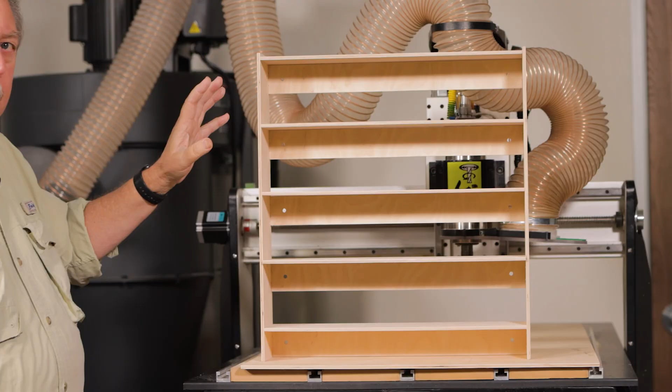Obviously, if we want to make it permanent, we would put some glue in these joints. But you can see how strong it is already just by making sure our joints are nice and tight. So what we'll do in the video today is go through the design software, Vectric VCarve Pro, show how we put the slots, how we decide where they go, and how we create the joinery necessary to cut this piece.

We'll be using Vectric VCarve Pro to do the design and walk through the design thoughts and concepts as we build a shelf similar to this one. It won't be this exact shelf. There's been some improvements put into the design, such as the support of these shelves. You'll notice this is sagging slightly. So we're going to take these backs that attach the shelves to the walls, and we're going to move them up adjacent to the shelves so they act as a support mechanism.

This is an example of a shelf we're going to build. As you can see, the support bracket, which attaches the shelves to the wall, also is directly underneath the shelf, helping to support and reduce sag when we're loading.

Each of these support brackets are going to be 2 inches by 18.5 inches long. Each shelf will be 18.5 inches long and 4.25 inches deep. The side structures will be 4.25 inches deep and 21 inches long. Those numbers will become important as we walk through the design of the shelf in the Vectric presentation.

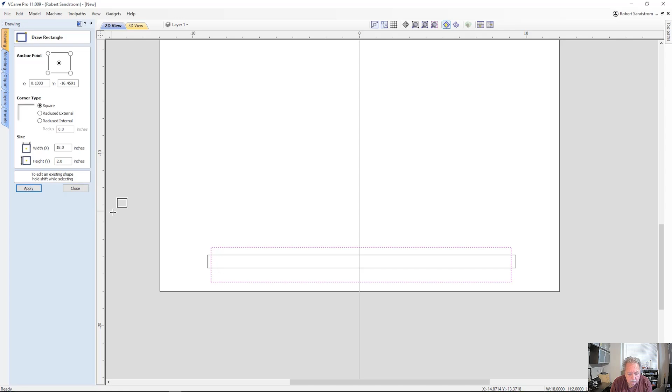Next rectangle for the piece we want 18 inches by 2 inches. Hit apply. Hit close. Take both of these and we'll center them in the material widthwise, so they should be centered within themselves. Close. Take this piece here, the tab, and put it right in the center.

So I select the inner vector first, then I select the outer vector, and instead of aligning to the material, I'm now going to align it to the vectors, and I want to align it in this direction. It should be already aligned here, but I'm going to make sure. All right, so close. So now we're at a point where I know, let me move this up a little bit.

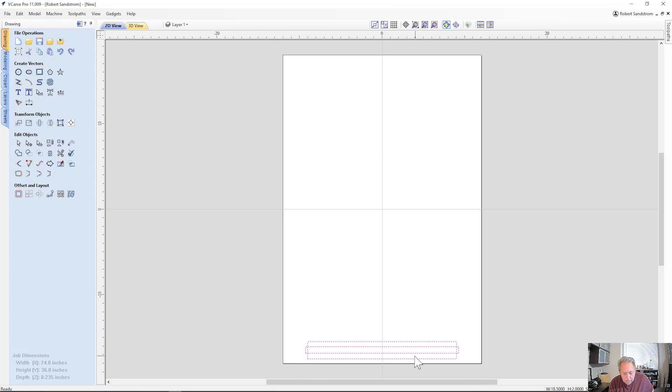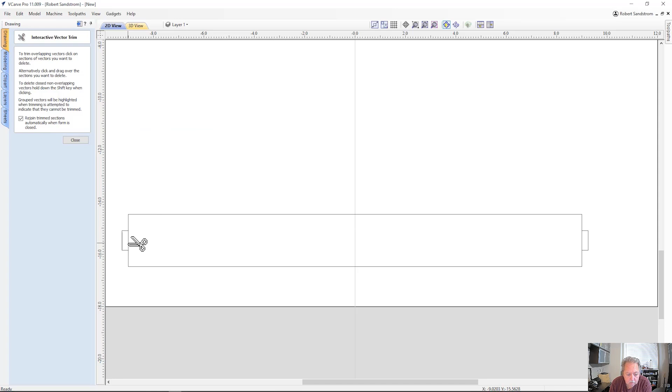All right, so now I know this is centered. I can make the component by taking out the parts of the vector that are no longer needed. So we'll use the interactive vector trim tool, make sure the rejoin trimmed sections is checked. Click here, here, here, and here. Close, and the result should be a closed vector. We'll validate,

close. Okay, the next thing I want to do is create holes to mount this bracket to the wall. I want to make them 16 inches apart, and the best way to do that is to first create one in the center and then mirror it. So now we're going to create a circle right there in the center. We're going to make that 9/32 equal. That's the size I want.

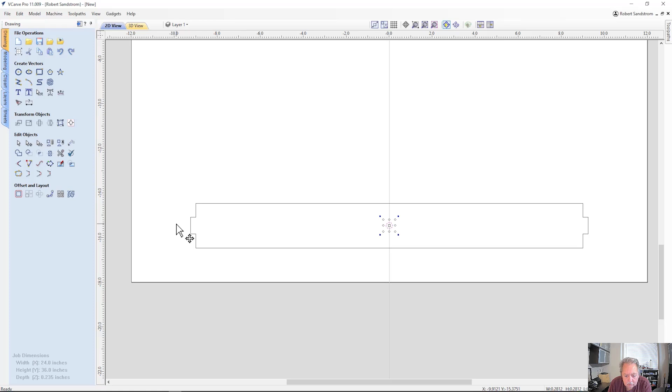Hit apply, hit close. So now we'll select the circle, and we're going to use the move tool. Using these tools keeps the accuracy. We're going to make it 16 inches total, so I wanted to make it minus 8 inches, 0.0 inches in the X direction. That puts it exactly centered 8 inches over.

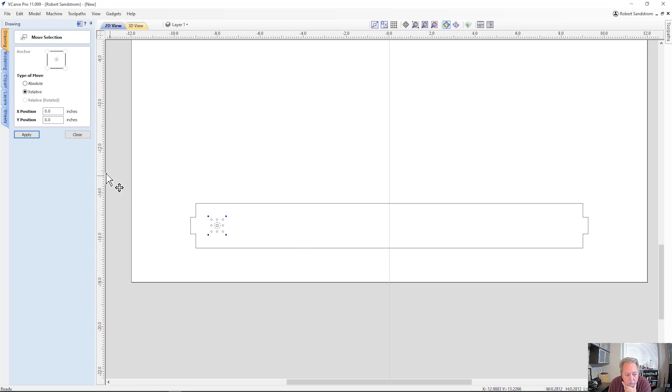Hit close. Then I use the flip tool, and since everything's centered, I can flip it horizontal and create a mirrored copy, and it should be exactly in the center. And we're set, and we've got our first component done, which is the bracket that goes across the back. It supports the shelves and allows it to attach to the wall.

We'll move on to the second component at this time, which are the shelves themselves. That component is 4.25 inches by 18.5 inches with 0.75 inch tabs. We'll start out once again by making the tabs. Use the rectangle tool, and we'll make it 0.75 by 18.5. So 18.5 inches wide, 0.75 inches tall. Hit apply, hit close,

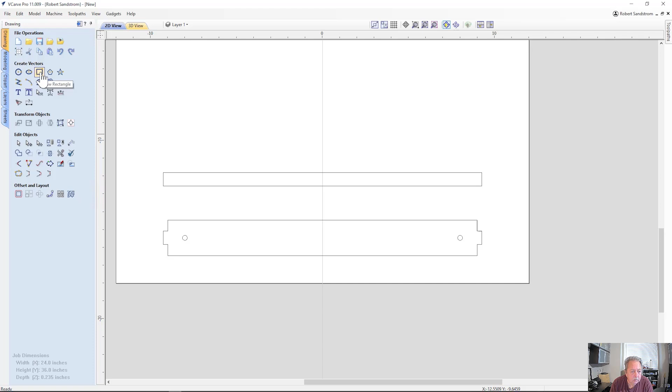hit a rectangle. We'll start in this corner, same corner, so we're aligned. And then I'm going to make this one 18 inches and 4.25 inches. We're doing that because this piece will be like this one with tabs. So hit close.

And the first thing I want to do is align these along the bottom. So this is the first vector. I'll click the second vector. We'll use the alignment tool again. See how I keep using this tool. We're going to go ahead and align. Oops, wrong direction. We're going to align in this direction so it's aligned along the bottom. Then we're going to align so that they're centered, by selecting this one first and this vector second. All right, so now we're centered.

Next step is to put these in the right area. So the front of the shelf, I want to make 0.5 inches away from the bottom. So I'm going to select this vector. I want the tab 0.5 inches in, and I'm going to move that tab in the Y direction 0.5 inches. Apply. Close.

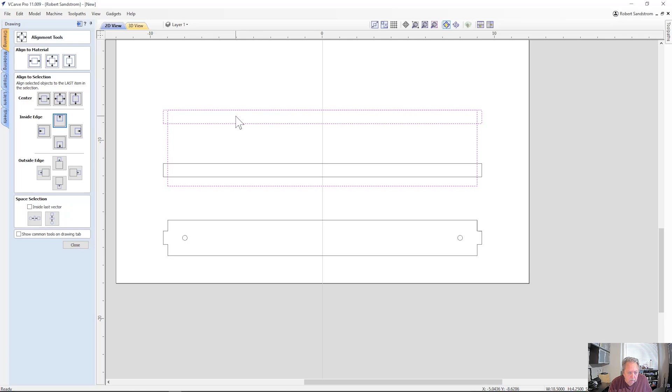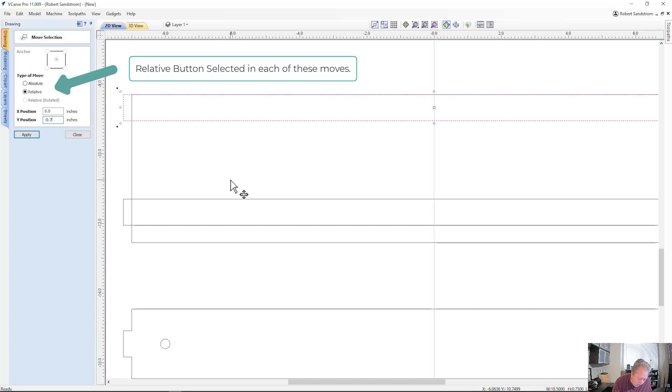So I want to move this vector now. Close. I want to move it using the move tool, negative 0.75 inches in. Close. And the reason I wanted to do that is the shelf is actually, I'm using nominal values, about 0.25 inches thick. It's really probably 0.23 or so.

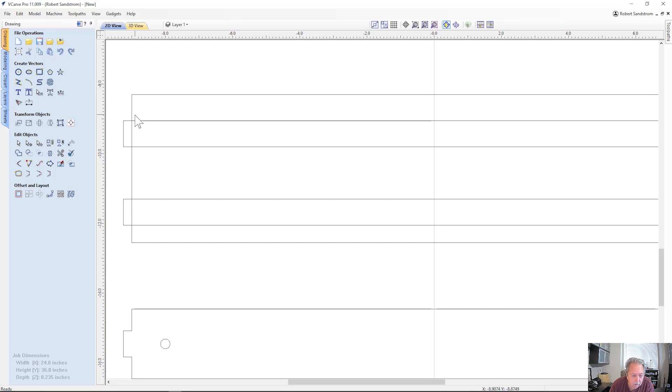And I'm going to put the slots for the shelf supports, these ones right here, starting about a 1/4 inch in, allow a 1/4 inch this way, and so the tabs I want to be far enough in where they're not blocking us putting in these supports. Now I will turn it into a component by using the scissor or interactive vector trim tool. Remember, this has to be checked.

And now we have our second component built, which is the shelf. The next component we're going to build are the side pieces, which actually hold all the shelves and the support brackets, and it admittedly is a more complicated piece. But taking one step at a time, it's not all that bad. It's just that we've got to make sure everything is done right for everything to align.

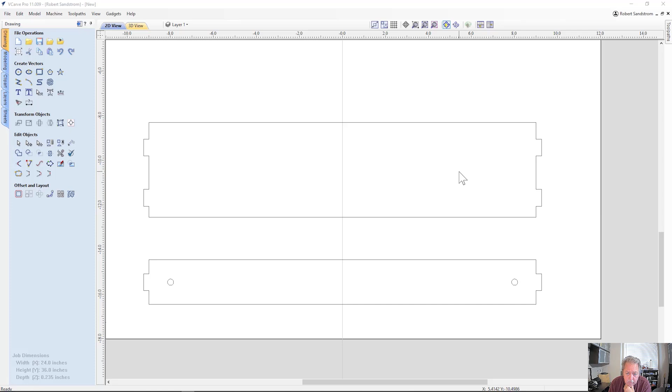Well, actually the sides are 20.5 inches by 4.25 inches. Use the rectangle tool. So we're going to take it 20.5 inches by 4.25 inches wide, hit apply, hit close.

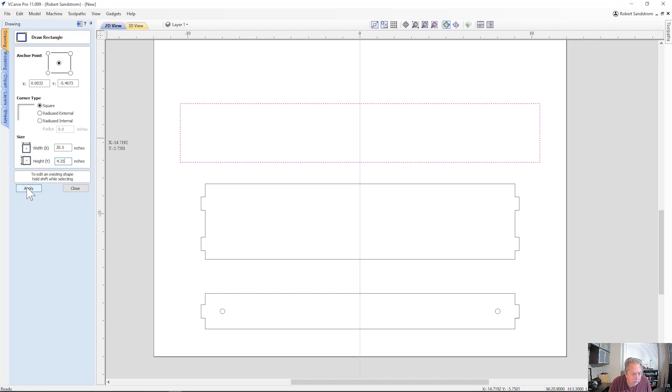Alright, so we have our basic structure now. Again, check the alignment. We want it aligned in the horizontal direction to the material. Looks like it is, so that when we build our pieces, everything is done in a way that is symmetrical. So the first thing I'm going to do is take this shelf, which is going to be used to support the material, and make a copy of it.

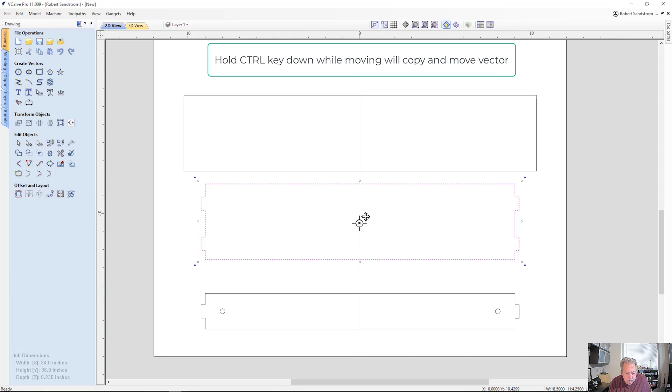So I'm going to click on it again twice, then I'm going to hit the control key, grab the shelf, and bring it up into this piece above, and I'm using this simply as a guide. So the first thing I'm going to do is now click on the outside material, and I'm going to use the alignment, align to selection. Okay, so now we're aligned this way.

Next thing I'm going to do is take this piece here and align it to the inside edge. So now I know that this piece here is actually aligned to the inside edge. So I now know that this is exactly aligned with this, and I'm going to move this in because I want the slots for the top shelf to be approximately 0.25 inches down. That will allow me to have material at the top.

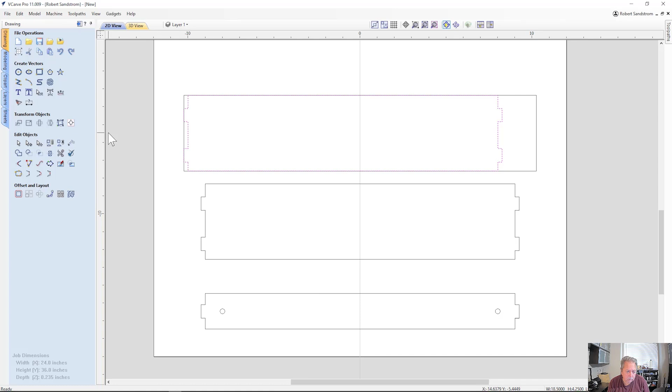So I'm going to take this inner component, use the move tool again, and move it in the X direction 0.25 inches. Okay, now that I've done that, I know where my slots need to be. So I'm going to go ahead and click off that, and next I'm going to use my rectangle tool to make my slots.

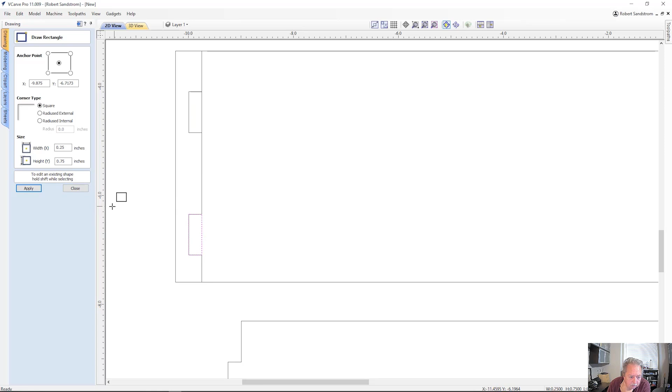Pull that up. So you can see it's 0.25 by 0.75, which is what I expected. Hit apply. And I'm going to make another rectangle, similar, in the other slot location. 0.25 by 0.75, apply. Hit close. And now I've got this in the location. So this shelf is going to slot right into these slots when it's all said and done. We'll come back and adjust the size of these slots so that all of this will fit together in the future.

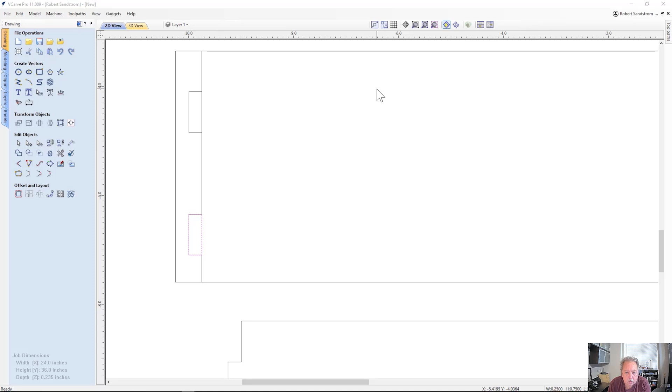So now I want to make the slots for the bottom part of the shelf, and I'm going to take this material and move it. So I'm going to hit this material first, select this component, and once again use the alignment tool to align to the right edge. Hit close. And what I know is I want 2 inches of support. That's the width of this. And I'm going to slot this in the back, and I want it to hold up the shelf as support.

So since this is 2 inches, I'm going to want this shelf up 2 inches when I'm creating the support. So to do that, I'm going to select the inner component, use the move tool, and move that minus 2 inches. And apply. Close. So now I'll go ahead and make my slots in this area similar to the ones I did up top. Okay, to make the slots, I'll do the similar process.

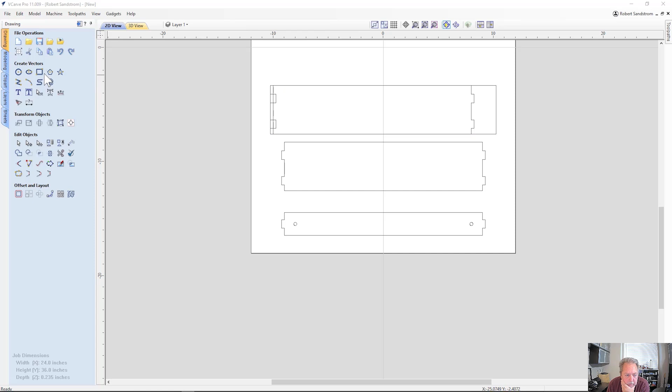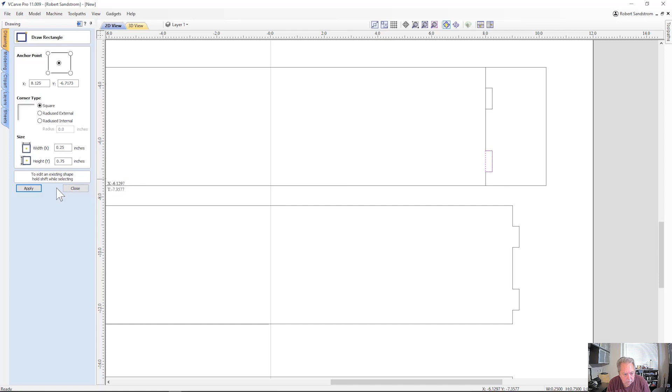I hit the rectangle tool. Let me blow this up to make it easier to see. 0.25 by 0.75. Apply. Apply. Close. And now I have slots at the top and the bottom where these shelves are actually going to be located. Let me move this component out of the way so you can see where those slots are.

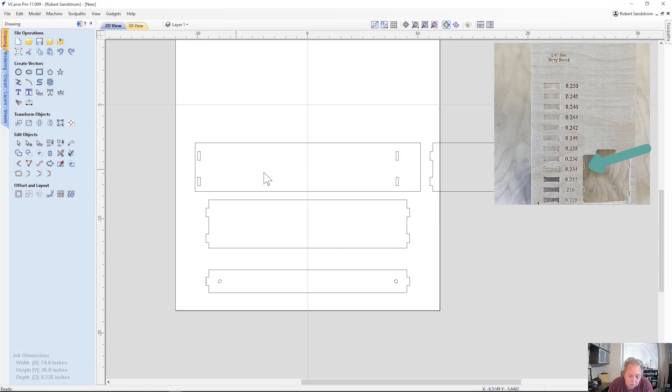Okay, those slots now are all located at the top and the bottom where I want the support. We want to make sure these slots are all the right size. From a previous effort, I created a storyboard in which I determined the right slot size for these would be 0.234 inches thick and 0.75 inches long to meet these tabs. So we're going to make each of these slots 0.234 inches thick, and we're going to keep the 0.75 inches.

So with that, let's go ahead and do that at this time. So we'll select all of those. We'll hit the resize tool. We're going to scale items individually. We're going to make sure that the link XY is not clicked. It is not. We're going to create 0.234 inches. Hit apply.

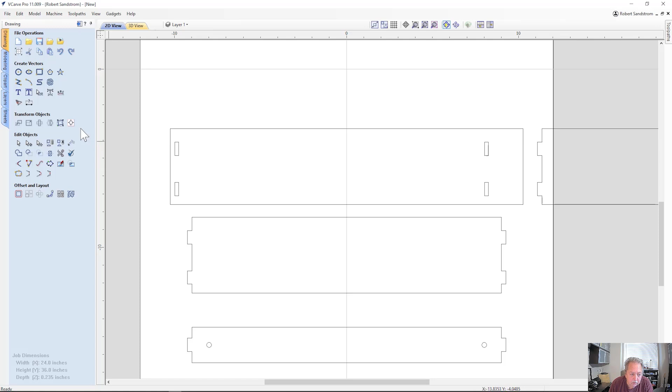To make these material fit together, we need dog bone fillets put in each of the corners and in each of the areas where they're going to meet up. Let's go do that at this time. We do a dog bone fillet by selecting the fillet tool, and we use dog bone fillets. And I know that this is the right value right now, but just to be sure, you have to know what size bit you're going to use. We're going to use an 1/8 inch bit, so I put 0.125 inches in there times 0.5. And I hit the equal, and Vectric does the math for us in figuring out the radius of the tool.

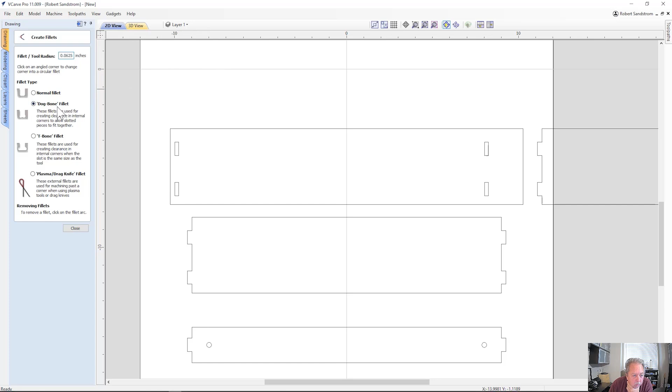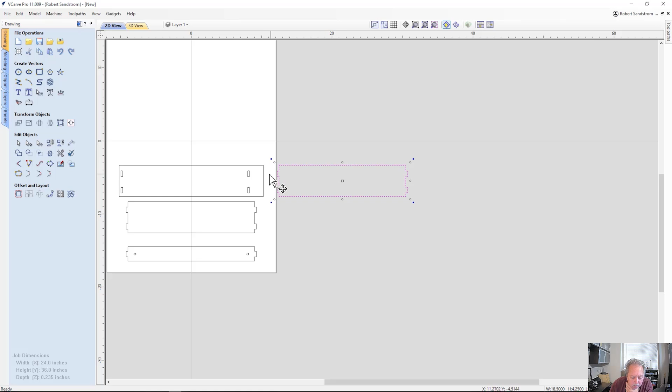We select dog bone fillet, and now we'll put the fillets in each of these. Hit close. We'll move this further off to the side. I shouldn't need it again, but if I do, I want to make sure that I have it available.

So the next thing I'm going to do, just to make sure everything's aligned, I want to go ahead and, for a second, group this component. Once again, this continuing to align across the center is important because I've just run into problems too many times. You don't have to do it, but that's what I do. And I'm going to hit alignment, and I'm going to align it across the center to the material, and that tells me everything is on job center. I'll select this again and I'll ungroup it.

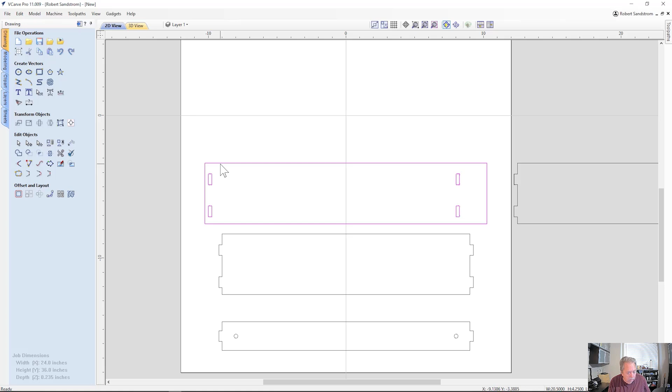Now that we have our top and bottom shelf, we need to put the individual shelves in between. And I'd like to have them equidistant as I go through. So the best way I find to do that is, again, by using these alignment tools, which are a powerful source. The first thing I want to do is equidistance between the top shelf and the bottom shelf. I'm going to go ahead and create a vector that will allow me to make that alignment. So I'm going to hit the rectangle tool.

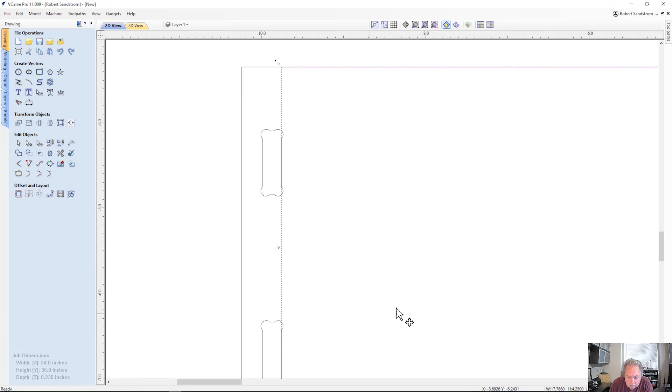And I'm going to pretty much go right along the line there so that I'm centered in that direction, and right along the bottom here, and that will allow me to center between those. Maybe what I want to do is change that slightly. I want to center between the actual shelf surfaces, so I'll go to that selection and I'm going to hit close because I want to actually resize that to make sure it's along the bottom. So I'm going to resize this so it's on the bottom part. There we are. And come back over here just to make sure it's along the bottom close enough. Click off there. And so now I have a vector to place these shelves in.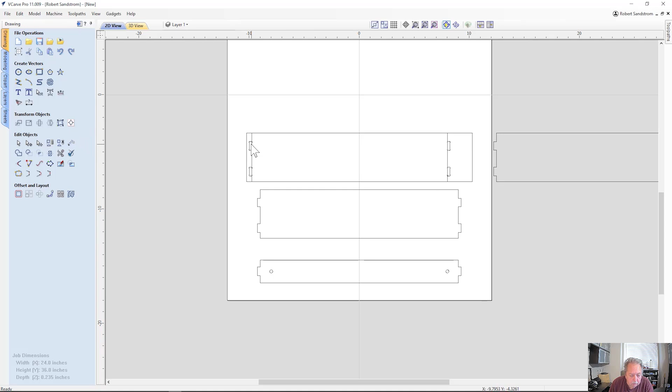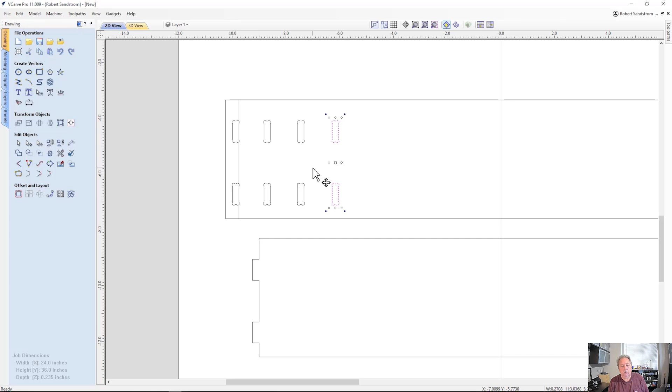So I'll use the alignment tool by first making copies of each of these slots since they're the right size. I select them, I click on it a second time. Now I'll hit the control key and I'll move this one down, making sure I line them up, keep the control key down, that one, and I want 3 shelves. So I'm moving along that dotted line to make sure everything's aligned. So now I have the 3 shelf brackets that I want, and I want to put those equidistant across.

So the best way is to use the equidistance tool, and I'll do that by first clicking on the alignment tool, and I'm actually going to use this tool down here. These 3 holding the shift key down, these 3 holding the shift key down, and this is the last vector. And I'm going to now select this tool. You'll notice when I selected all of the vectors together, it thinks of these as individual closed vectors. Doesn't matter that they're separated out from each other. So when I hit the equidistance, it's going to go in the order of the vectors. And so you'll notice it's equidistant from here to here, to here, to here.

That's not what I want. Let's hit Control Z and undo that. And what I really want to do to get the right spacing the way I want it is I'm going to go ahead and select these vectors. Then I'm going to hit the Shift key and select that vector last. I'm going to use the equidistance, and now I notice that I have equidistance between this box and this box for each of the shelves.

Then I'm going to go ahead and select all of these by putting a bracket around them, use the Shift key, and I'm going to now do that again, and now you'll see they all align up equidistance across from each other. So I have the right spacing I wanted for the shelves. Hit close. We want these to align 1/4 of an inch in.

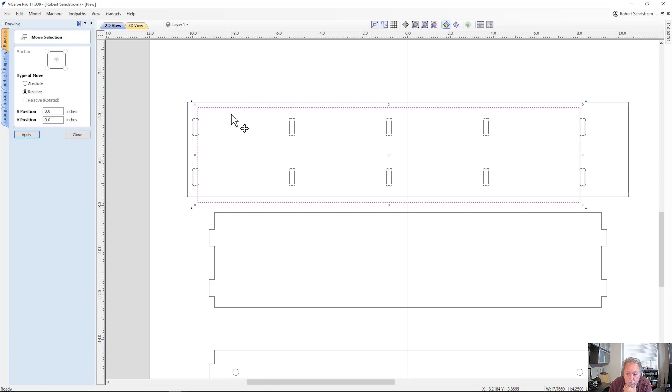So I've got that. I'm going to hit close. I don't need that anymore. I want this to be just a little longer because I'm going to have a support down here. So I'm going to want to open this up a little bit. It's not important how far. And now I've got my 0.25 inches along the bottom here. So the next step is to get some of these put in place.

So we'll take a shelf support or a slot. We'll take a slot now, and I'm going to make a copy of it. Control C and Control V, that gives me a copy. I'll hit the 9 key, which allows it to rotate. You could have also used the rotational tool over here and rotated it. I just simply used the 9 key shortcut and rotated it 2 times. So now I have this extra slot created.

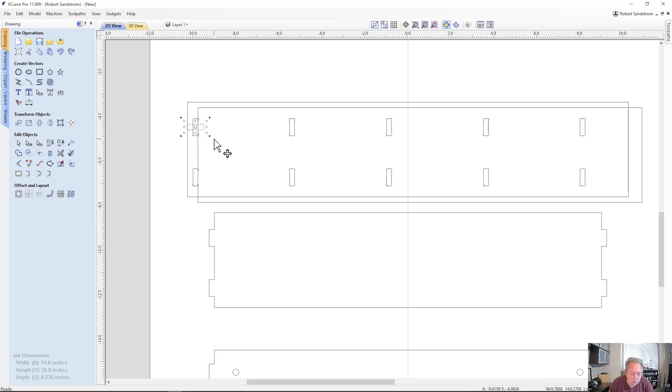I'll take that slot now. Let me blow this up a little bit so we can see it. I'll use the alignment tool like we've been doing before, and I'll use a different version this time. So I'm going to pick this first, then I'm going to hit the Shift key and pick this slot, and I'm going to go ahead and align this to the outside. So that now has me aligned to the outside of this slot.

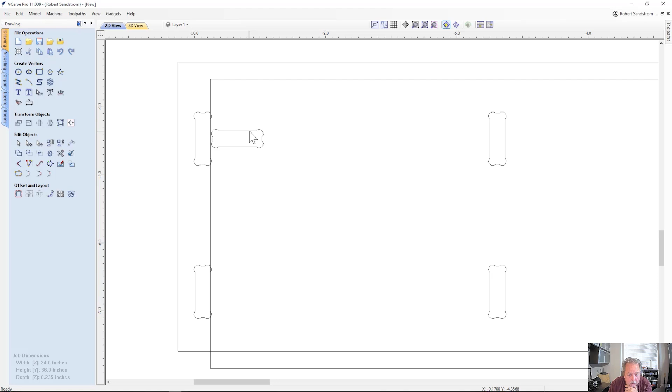I'll hit close. I'm moving this down; we said we want the slots to align across this line. I'll use the alignment tool. I'll select this slot, this vector last by hitting the Shift key. So I selected this vector, and then I hold the Shift key, I select this vector, and I'm going to align to this inside edge, because I want the slots all along the inside of this line. And I'll hit right here. So that tells me that that slot is directly aligned on this line.

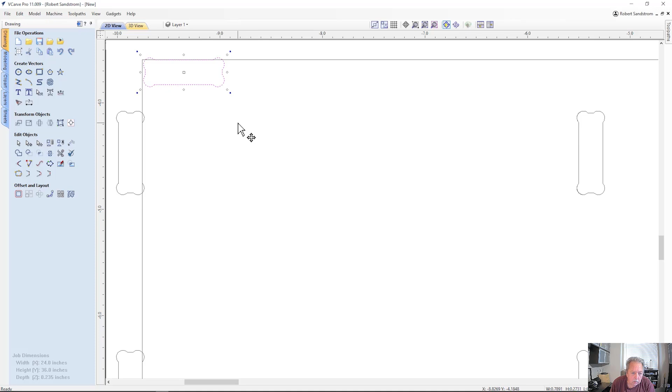Hit close. At this time, we've created all the slots for these shelves, and we've created one slot for the back support brackets, I'll call them. And the next step is to create the rest of these support brackets and make sure they're aligned so they'll be in the right location relative to the shelves. So the first thing we want to do is double click on this, and move this slot so it's right aligned with that guideline that we put in place before. The next thing we want to do is make sure that it's actually aligned with each of the shelves it's going to support.

So to do that, we want to use the support bracket that we're actually going to use. So at this time, we'll take a selection of that bracket by clicking on it. Then we'll hold down the Control key to make a copy as we move it, and move it up out of the way. So now we have a copy of the dimensions.

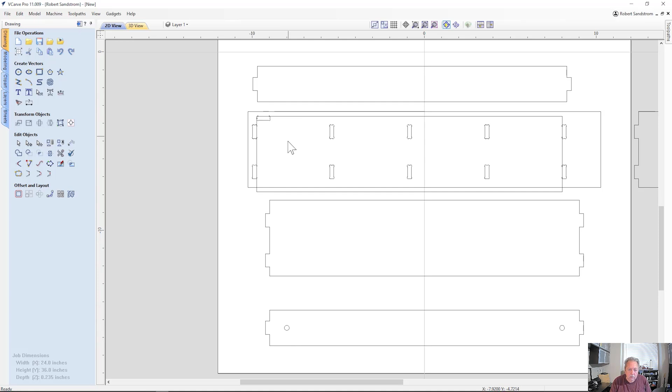I'll click on it, I'll hit the Node Edit key, and I only need a small section to use as a guidance. So I'm going to break this vector down, and I'm going to hit the right key, and I'm going to hit Cut Vector. And right below it, I'm going to hit the right key, hit Cut Vector. Then I'm going to delete this section of the vector by hitting the Delete key because it's got the nodes already selected.

I'm then going to take this vector, go back to get out of Node Edit mode by hitting N again. I'm going to rotate this vector 90 degrees by hitting the 9 key multiple times. So now I have the direction I want. Okay, now I have the components necessary to get everything aligned the way I want to with these shelves, and that's the best way in my mind to do this because we're using the actual size of the components we'll cut.

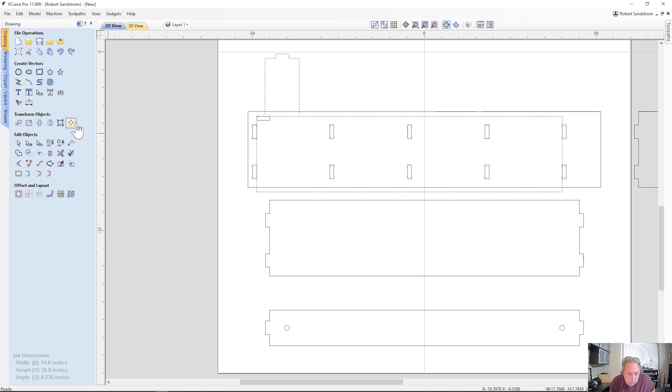So I'm going to get this aligned the way I want it aligned, and the first thing I want to do is align it inside the component. So I pick this one first, this one second, and now I'm aligned right on this component line that I wanted, which works out just fine. Now I pick this component, and I pick this component, and actually this component.

I pick this component and this component, and the reason I'm picking this component and not this component is because you can see this component's vectors end right here for the dog bones. But where I really want this to align is I want this shelf to be right aligned and support this section right here. So with that being the case, I need to align the vector to this alignment component.

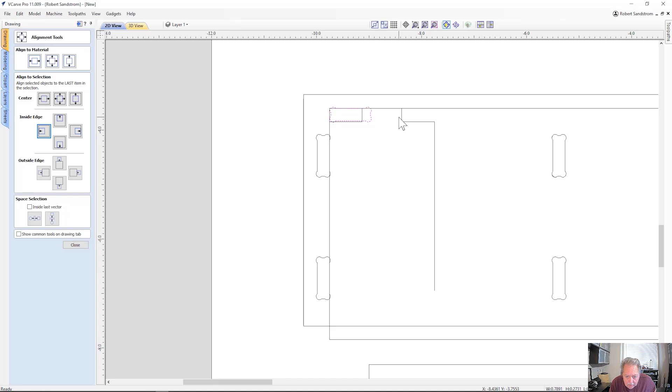All right, now I've got the support bracket aligned along the direction that I want it to relative to these shelves. So the next one I want to do is I want to click on the slot that will be holding that tab, select the center. You'll notice when I do that, this slot is now centered on this tab, which is aligned with the shelf and the alignment bracket. Hit close.

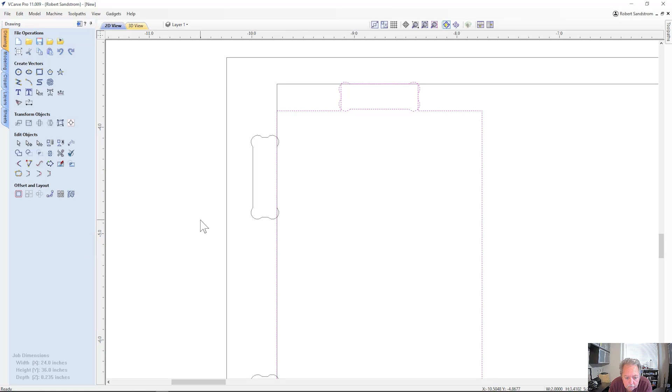So now that I have this slot and this bracket aligned right where I want it, I need to make additional copies and move them across. And the easiest way to keep everything aligned and not get separated is to actually group these two components. But before I do that, I just realized I really want to make a separate layer for these slots.

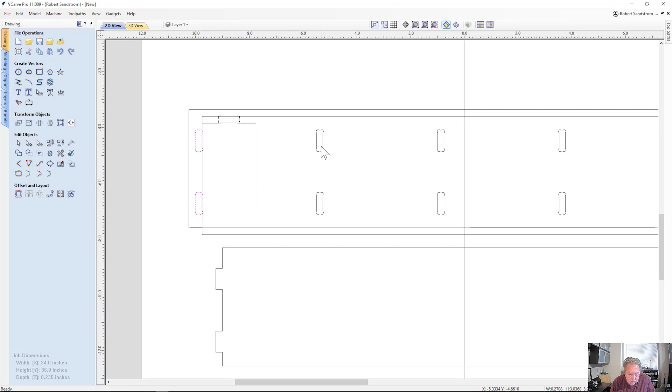So I'm going to select each of these slots, and I'm going to move them to a new layer that I'm going to call slots. And I'll make those slots green, just because I can. Hit OK, and now I've got all those slots green, and I've noticed that I've got a double here, so I'm going to delete that. The slot layer, I mean. This is the double.

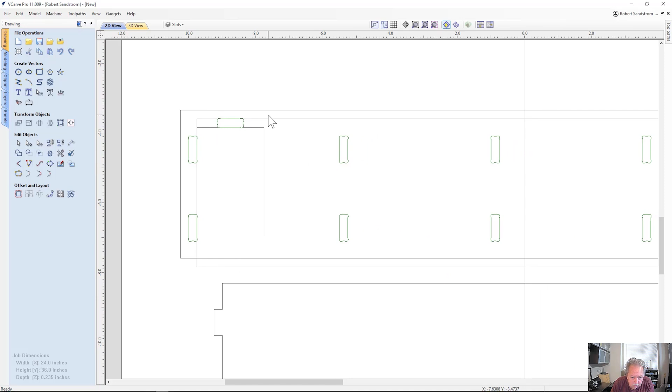Slots. And what I'm focused on is actually doing the building slots. So I'm going to select the slots as the active layer as we go through the rest of this process. It'll save me time in the future trying to actually change all the slots. So actually there are 2 more I want to move to that layer. Alright, so all the slots are on that layer.

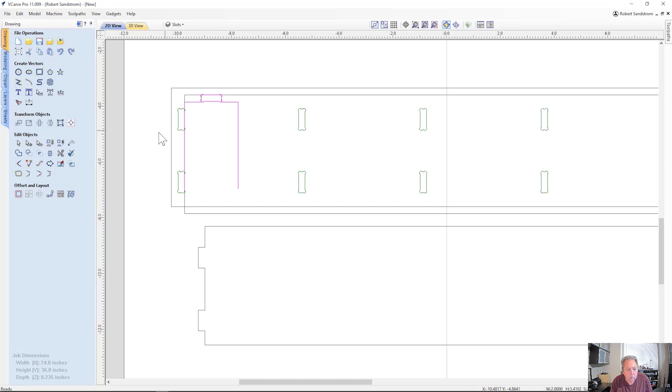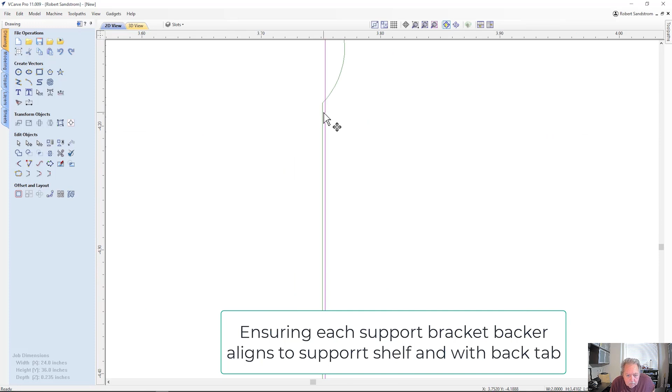So I'm going to go ahead now and group. Hold down the shift, grab both of those, hit G for group, or I could have hit group over here, and now I have those slots, and I'll go ahead and make the copies I need to as I move along. This can be somewhat tedious, but I want to make sure everything is actually aligned the way it needs to be.

So now you can see that I have each of these support brackets aligned so they'll fit within their individual slots. So the tabs on the end will fit within the individual slots, and the top of the bracket will actually support the shelf above it. And that's the concept of making these snap together shelves extra rigid.

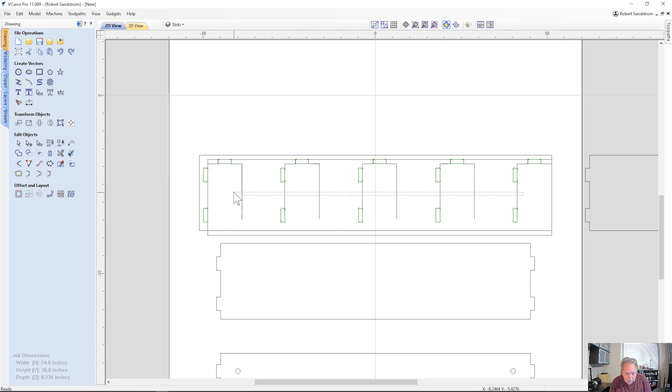Now that I've done that, we can go ahead and ungroup these components by selecting them all and hitting ungroup. So now they're all ungrouped, and the next thing I can do is select all those components by reaching across there and hitting the delete key, and we have the slots in the right location. We now have no need for this extra component. I'll hit delete, get rid of this extra component.

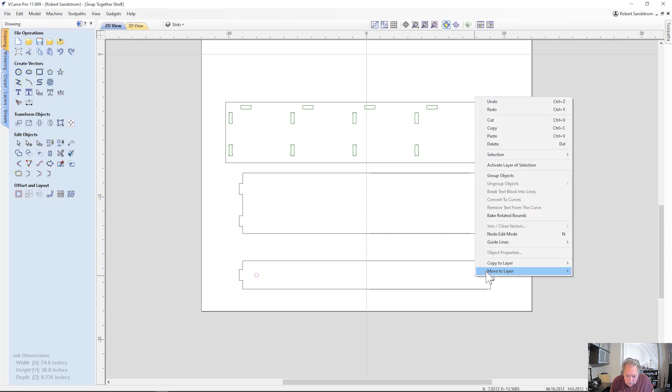These 2 holes, I'm going to move to a layer called holes. I'll make those, let's say, red. Hit OK. So now we have the holes on their own layer. We have the slots on their own layer. The next thing we need to do is take the outside profile cuts and put it on its own layer. So let's do that at this time.

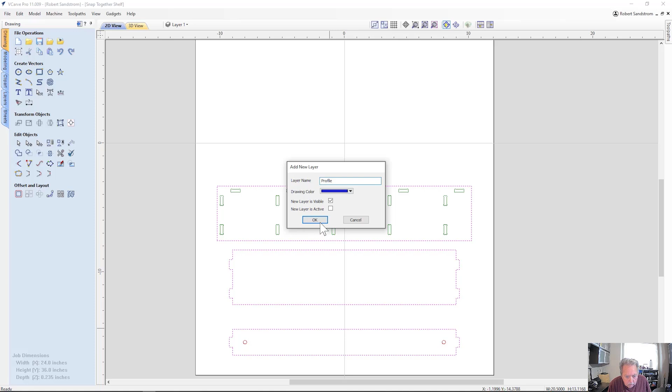Move to a new layer. Make it blue. Call it profile. Hit OK. And now each of these are on their own layers. The next thing we need to do is apply the dog bone fillets to each of these tabs. We still have the right radius, dog bone fillet.

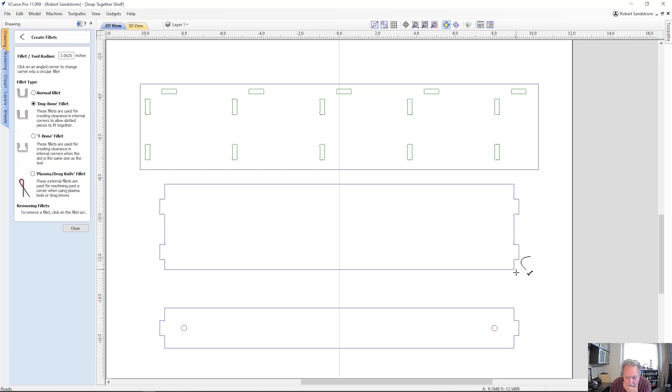Now that we have all the components built, the next step is to set up the cut sheet so that we have the correct number of pieces to put a full shelf together and then cut the material. So the easiest way I have found to do that is to make each individual component, like the side shelf and the support brackets, etc., a group so that things can't get moved around.

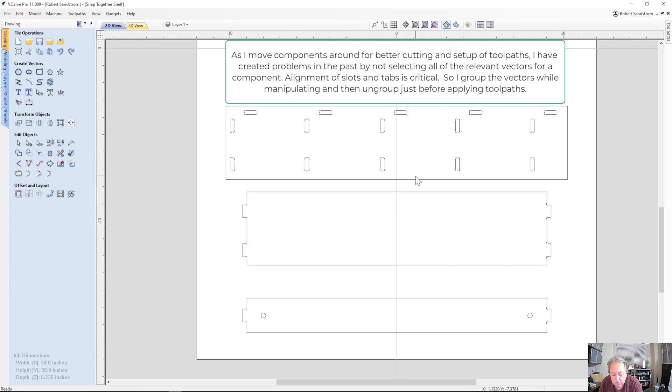If they have more than one vector, I don't want it to move around, so I'm going to select that side piece and I'm going to hit G for group. I'm going to select these lower vectors and hit G for group. And now these are each grouped so that when I move these components or sets of vectors around, they don't end up getting out of alignment between the slots and the profiles, the holes and profiles, etc.

So the next step is to set up the actual cut sheets for this. The easiest way to do that is using the VCarve Pro nesting tool. So we'll select nesting. We want to use a 1/8 inch compression bit as we set up the cut pass. Clearance between each of the pieces I'm going to leave at 0.5 inches. That will allow me to have enough room for tabs and have secure support. Others might want to be a little more aggressive, and that's okay.

The border gap I'm going to leave at 1, and this gives me plenty of hold down space for when I'm cutting these sheets later. I don't need to rotate the parts. I don't need to mirror the parts. I don't need to allow parts inside of other parts. I do not want to remove the original parts because I want to keep these parts together for future use. I don't need to do anything in the sheet options.

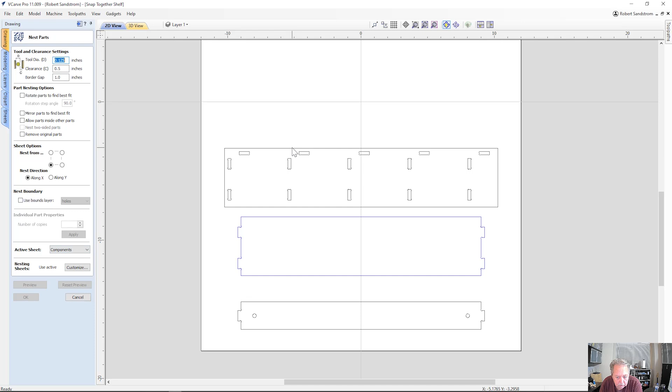Active sheet is components. So the first thing I want to do is select the number of copies for each component I need. In this case, for this top component, I need 2 copies of the side shelf. Hit apply. You can see a 2 pops up in the middle. The next components I want to do are the bottoms of the shelf. Hit apply and come down to this component here, and I want 5 of those. Hit apply, and so now what I have is 5 of that bottom.

If I hit the shift key and select the shelf, you can see there's a 5. I'm holding the shift key and I select the side shelf, and you can see now that we have 5 of the shelves, 5 of the shelf supports, and 2 of the sides. The active sheet is components, which is where we're at.

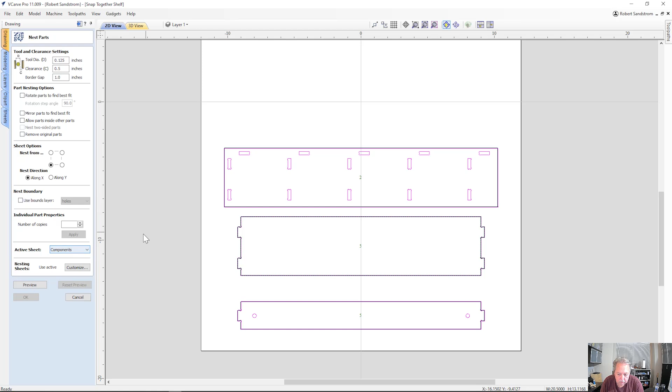So if I hit preview, the program, VCarve Pro, will add 2 more sheets, the same size as the original components sheet. And it will nest the components on there in the way it sees best to be most efficient. I like that. I'm gonna hit OK. Someone could rearrange these to get less wastage, but that's not the purpose of this video. And so at this time, I'll accept that and move on to the toolpaths.

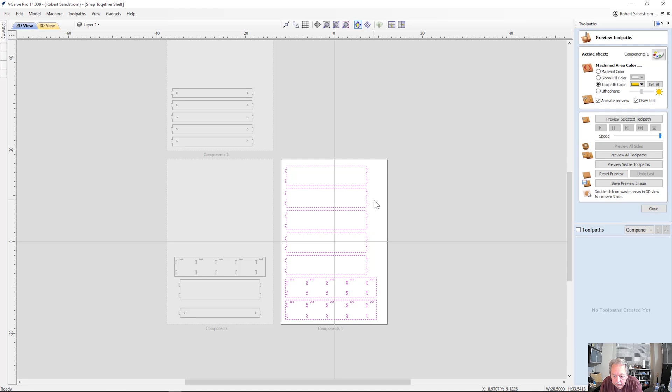Toolpaths, we're gonna set up using the layers option. So the first thing we want to do is ungroup each of these into their individual layers. So we're going to select all of the components on component sheet 1. We're going to ungroup objects back onto their original object layers. And as you can see, each of the profiles ungrouped onto the profile layer and the slots on the slot layer. At this time, I'll go ahead and set up a profile cut.

Put in Z to ensure it goes down to the bottom. I'm going to use a 1/8 inch compression bit, so that works for me. It's already been pre-selected. I'm going to cut the slots, so let me come in here because I want to cut the slots. Close. And the slots I want to cut on the inside, so we'll cut inside. We don't need any tabs. We've selected them to select all the slots. I'm going to call this slots 1, so I know it's my first cut sheet. Hit calculate, go to 2D view,

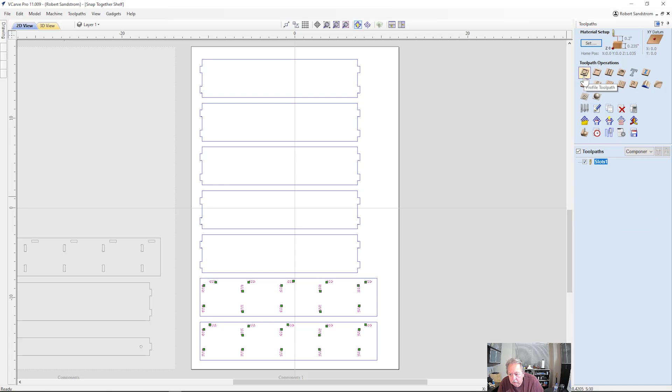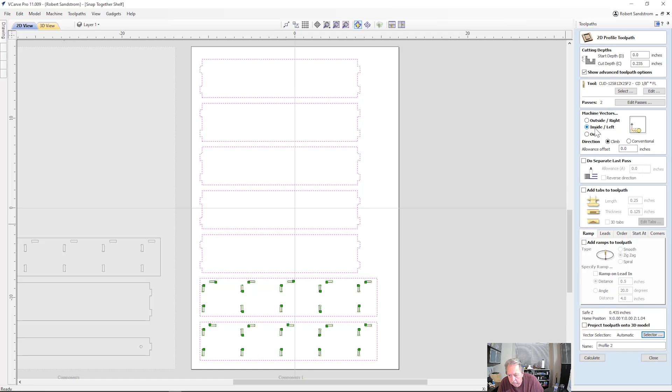close. I'm going to select a profile cut again. This time I'm going to select associate with toolpath, slots, profiles, close, and you can see that it's selected all of the profile cuts. 0.235 was what was selected with Z. That'll work. Now I want an outside cut. I'm cutting the outsides of these. I don't need a separate last pass.

I'm going to put in tabs, 0.25 by 0.125. I'm going to edit those tabs, and I'm going to use 4 tabs, add tabs, so I have plenty of connection points. Those tabs look good to me. So we got tabs, we got everything else set up. I'm using the compression bit, so I'm not going to ramp it. I'm going to go ahead and put down here Prof 1 so that I know that's my profile cuts on my first sheet. Preview the visible toolpaths, and everything looks good to me there. Go to the 2D view, hit close.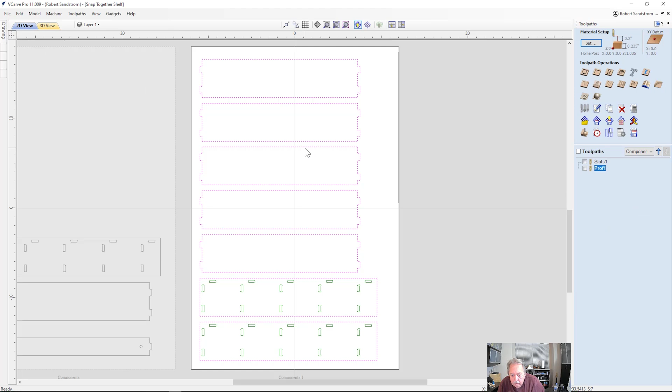And now, cut sheet 2. Once again, I'll do the same thing. I'll select all of those pieces. I'll ungroup them onto the original object layers. Check to ensure they're in their original layers. They are. Hit a profile toolpath, selector. This time I want to select the holes first. Close. I want to go 0.235. I don't need to change that. Inside, no tabs, nothing else is needed. I'm going to change this to holes 2, so I know that that's my

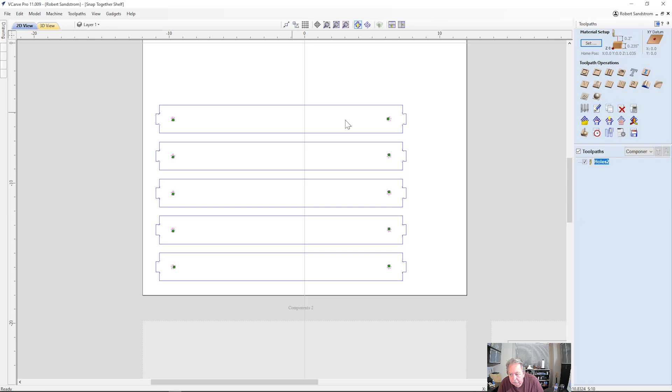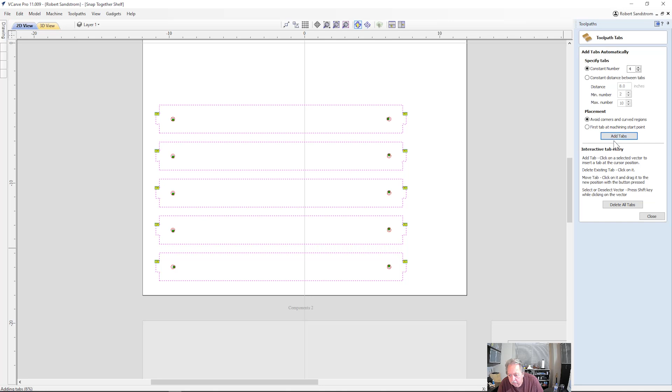second cut sheet. Go back to the 2D view, profile cut, selector, associate with toolpaths, select profiles, hit close, make sure that's what's selected. They are. This is good. Now I need an outside cut. I need to add tabs. Need to edit those tabs. 4. Add tabs. Close. I'm going to call this Prof 2, so I know it's my second sheet. Hit calculate. Preview the visible toolpaths to make sure everything cuts the way I think it is, and we're ready to cut. So now we set up our toolpaths for both sheets, and it's time to go to the Laguna and cut these sheets.

All right, we just completed the video demonstrating how to design this snap together shelf with snap together joinery, and we're about ready to go ahead and cut the shelf. Let me cover a couple things based on what we did in that design video. In the end, remember, we have 2 sheets of material that we're going to have to cut on to get the full shelf built. So this is sheet number 1, and this is sheet number 2. You'll see me switch sheets halfway through the video.

The other thing that I've done to make it easier for hold down is I've put 2 lines on here. So I've marked where the breaks are going to be between the shelves so that I can put some hold downs in the middle. One of the things I found out through experience is if you want to have nice, crisp cuts, there's a couple things that you need to do. Number 1, you need to use a compression bit. Number 2, you need to make sure they're held down, and with a sheet like this, there's flex. While it's cutting, it'll tend to bow up a little bit. So you want to have hold downs in the middle of the wood as well as the ends. So I marked these lines to know where I can put a hold down in.

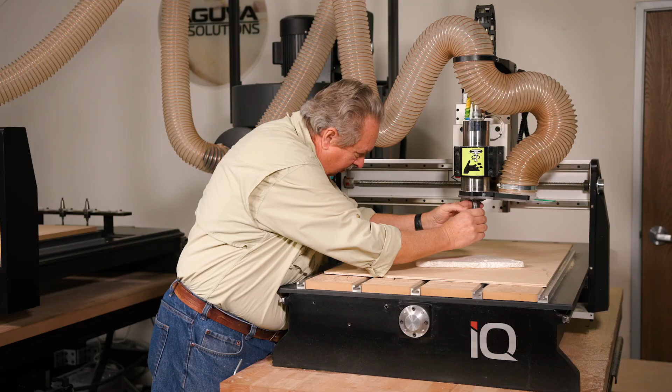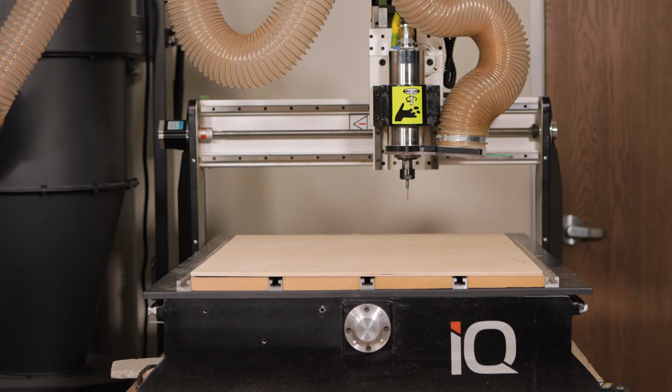Now that I've zeroed the bit, I'm going to move it out of the way. Sheet 1 of 2, I'm going to locate it right here in the corner. Hold it down. What I'm doing here is making sure that I'm not going to hit the aluminum track that it's actually holding. So now I've got everything held down.

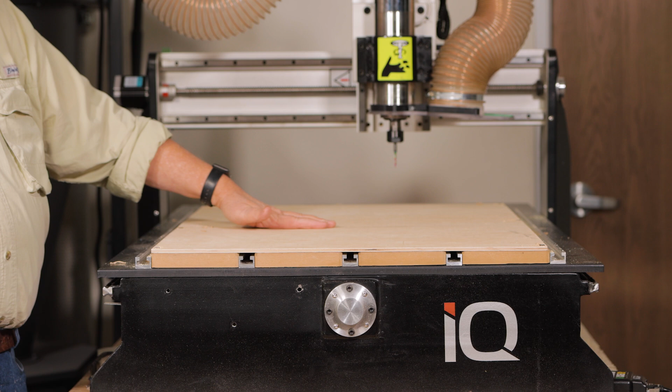One thing you might be asking is, well, if you know that you can't damage a bit with these nylon nails, why didn't you use these for all the hold down? The reason I don't use the nails for all the hold down is sometimes they can be a little bit of a bugaboo to get out. When I try to take this off, you'll probably see it, I'll end up snapping these nylon nails. And then I'll have to just shave off the head so it doesn't interfere with my spoiler board in the future. It'll be fine. They'll be left in the spoiler board, but sometimes they're a little tough getting off. So if I have a good location and I know I'm clear and won't damage the bit, I won't use the nylon nails.

So with that, let's go ahead and zero this machine in the XY direction. We've already zeroed it in the Z, recall. Before I put the material down, I zeroed it off the bed. Now this is not a critical evolution. We just got to get close to this corner. Because we do CNC, we want to be accurate, so we're going to make sure that we get it as close as possible. Lining up with the V bit. Okay, we're in the right location. I'm going to hit X, Y, 0. I've already zeroed out the Z.

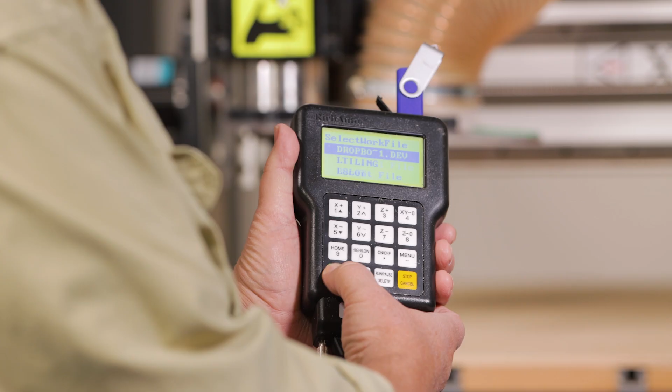So now we're at the point where we can go ahead and run our toolpath. We have our X, Y, 0, our Z, 0. We're now ready to cut the material. What you'll see is a series of cuts. It'll be 2 passes and then we'll be done. So we'll go through sheet 1, hit OK, and after we hit OK, then we'll turn on the dust collection.

Sheet number 1 is done now, so now we're going to switch to sheet number 2. We'll take sheet number 1 off. Okay, as you can see, the nails are stuck there. So what we have to do is use a little gentle persuasion. This is what I was talking about with those nails.

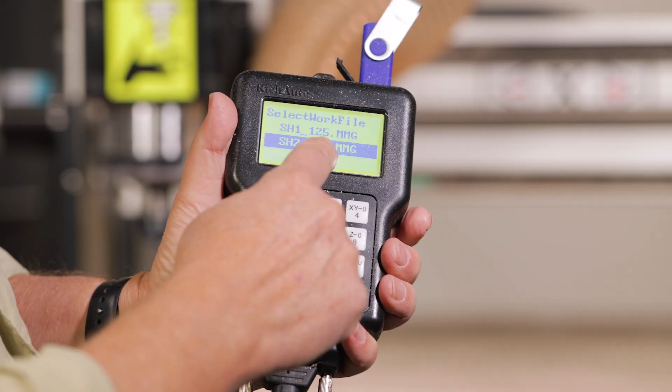I'll check the zero real quickly on the XY just to make sure. Yes, that looks good. So here we go. We're going to start with sheet 2, 1/8 bit compression.

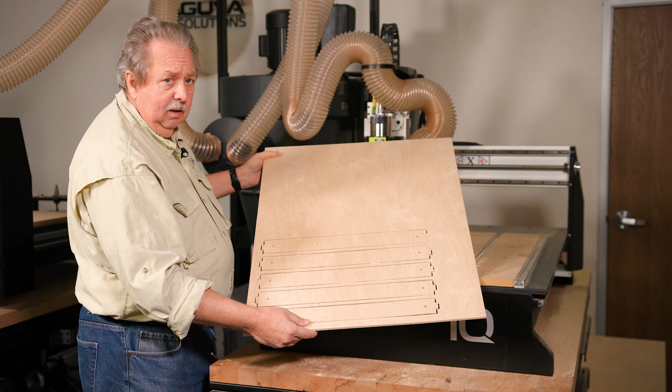We just finished cutting this project. Now it's time to remove it from the bed. Once again, that's the advantage of using a compression bit. If I had just used a down cut bit, the top would have been clean, but the bottom, we would have experienced a lot of tear out and a lot of repair, sanding, etc. That's not the case either on this sheet or the other sheet.

If I had used an upcut bit, then the bottom would have been good, but the top would have been experiencing tear out. So that's why you use a compression bit. In this case, I used a 1/8 inch, a 1/4 inch, just a compression bit is all that matters. Okay, the next step is to cut all the tabs in those slots, pull each of those slot pieces apart, and start putting the shelf together.

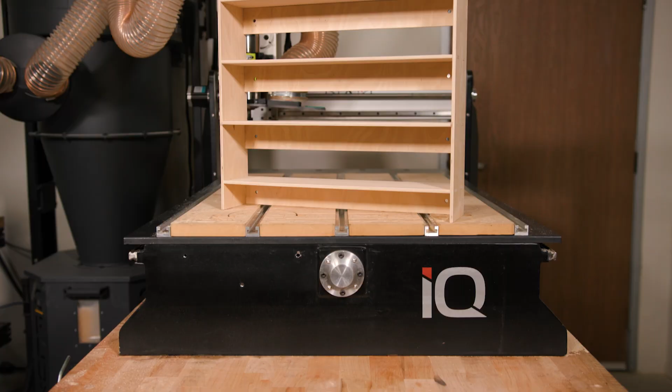When we get done putting the shelf together, this is what it's going to look like. As you can see, the design is pretty sturdy. It's held with all of these snap together tabs that go into these slots, and we've designed it so that the shelf support brackets go right underneath the back. So not only does it hold it against the wall, it stops the shelf from wanting to sag. That was an intentional design characteristic of this shelf. Very easy to put together, very easy to break down if you decide you need to break it down.

One of the key things to this shelf is actually this slot size and this tab size. You got to get those right. So one way to do that is to build yourself a storyboard. That can be seen in another video if you're interested in looking at it at Generations Custom Creations YouTube channel.

Thank you again for watching. Really pleased with how this piece turned out. The joints are tight, the shelves are strong.